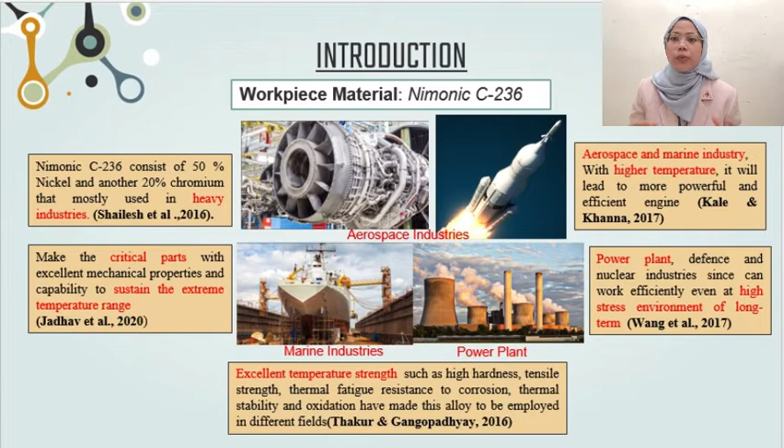Excellent temperature strength such as high hardness, tensile strength, thermal fatigue, resistance to corrosion, thermal stability and oxidation have made this alloy suitable for critical parts with excellent mechanical properties to sustain the extreme temperature range.

Next, to machine the Nimonic C-263 workpiece material, high-speed turning is used. High-speed turning is the machining of the external surface of the workpiece by rotating a single point cutting tool to remove material from the workpiece. This high-speed turning is around 2 to 50 times higher than the conventional machining cutting speed.

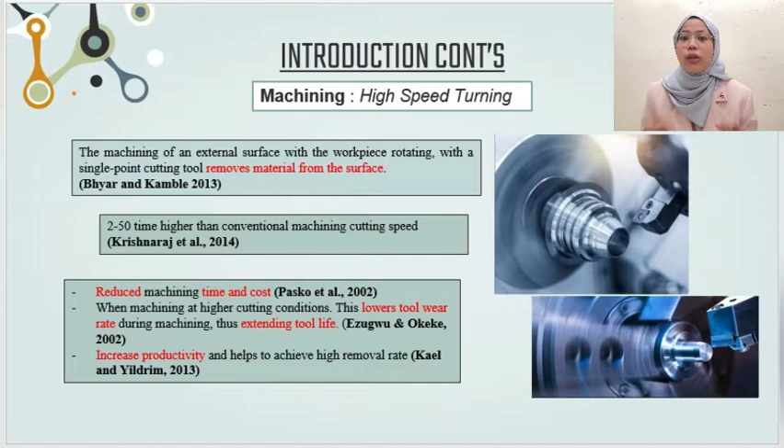High-speed turning can reduce the machining time and cost and increase the productivity, which can be achieved by a higher material removal rate (MRR). Then, when machining at this cutting condition, it will lower the tool wear rate and thus extend the tool life. Just using high-speed turning is not enough to study the tool performance during turning Nimonic

C-263. Cryogenic CO2 coolant is a neutral coolant. Basically, coolant exists as a cutting fluid. Coolant fluid helps to increase the tool life, enhance the surface quality, and decrease the cutting force.

But conventional coolants fail in lubrication at higher metal removal rates and cause environmental pollution. So this cryogenic CO2 coolant is a clean technology and environmentally friendly. It also does not have a dangerous effect on the operator. This cryogenic CO2 coolant technique is done at a temperature of -78 degrees Celsius.

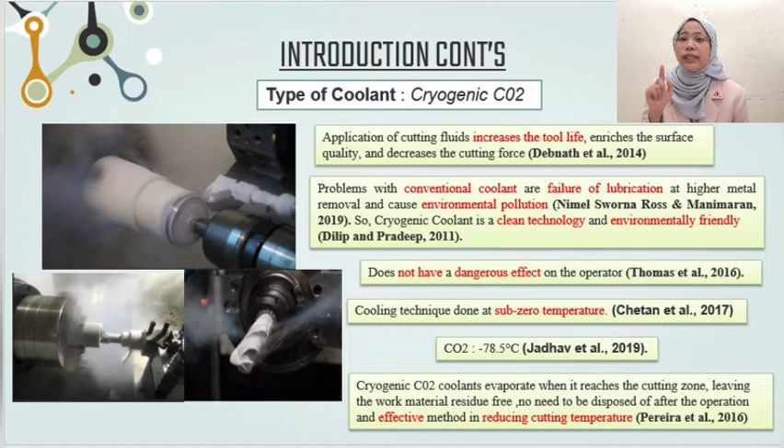The problem statement in this project, first, Nimonic C-263 alloy is in great demand in heavy industry, but great difficulty is observed while machining this Nimonic C-263 alloy at various stages due to its low conductivity at higher temperature, work hardening tendency, and rough particle formation in its structure.

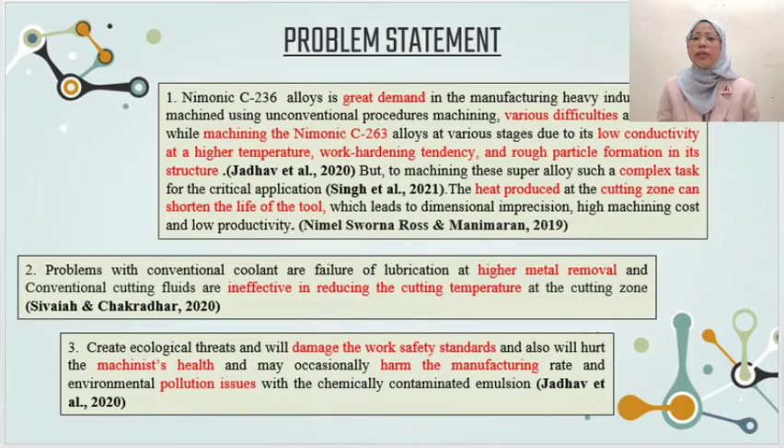Due to high temperature during machining, the heat produced at the cutting zone can shorten the life of the tool. Second, the problem with conventional coolants is failure of lubrication at higher metal removal rates, and conventional cutting fluid is also ineffective in reducing the cutting temperature at the cutting zone. Thirdly, most cutting fluids will damage work safety standards and also harm the machinist's health. That will harm the manufacturing rate and cause environmental pollution issues.

The objectives in this project, first, to identify the significance of the cutting parameters on the tool life during turning Nimonic C-263 alloy under cryogenic CO2 coolant. Second, to develop a mathematical model for the tool life through statistical analysis. And thirdly, to optimize the cutting parameters towards the tool life of the carbide insert.

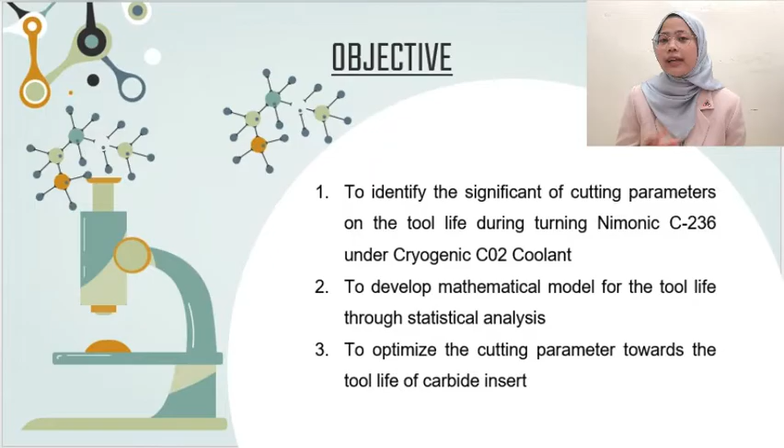Regarding the literature review on my screen, I would like to summarize. The Nimonic C-263 has a higher percentage of cobalt, between 19% and 21%, that will improve the material strength and high plastic distortion that make the material harder to machine. Then development of BUE will blur the surface integrity and lead to tool failure.

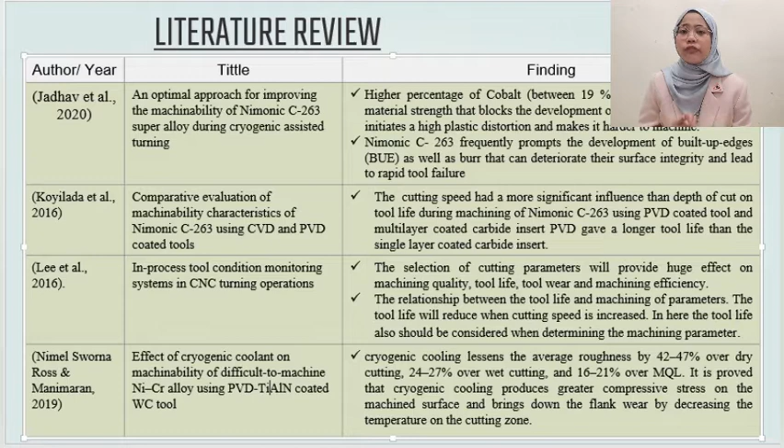The selection of the cutting parameters will have an effect on the machining quality, tool life, tool wear, and machining efficiency. The relationship between the tool life and the machining parameters is that the tool life will be reduced when the cutting speed is increased. Here, the tool life should be considered when determining the machining parameters.

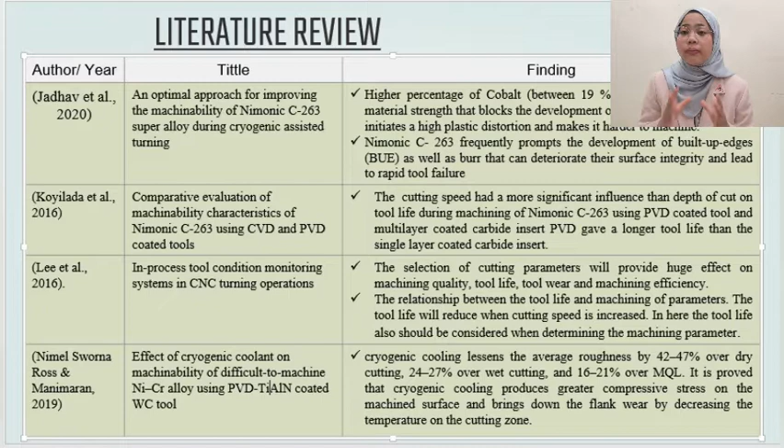With the help of the cryogenic CO2 coolant, it's another effective approach to keeping the cutting zone temperature well below the softening point of the tool material. The cryogenic process will increase the tool life by increasing its toughness substantially and also its resistance to wear.

Based on this literature review, it has been established that the machine tool properties, workpiece properties, cutting tool properties, and machining properties deeply influence the machining surface integrity and the tool wear.

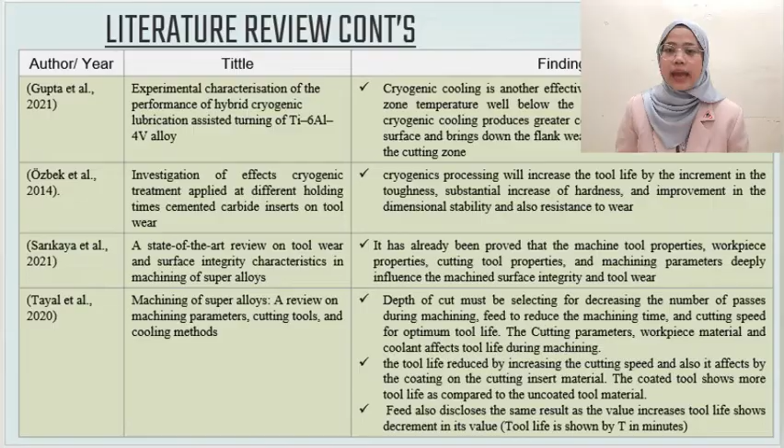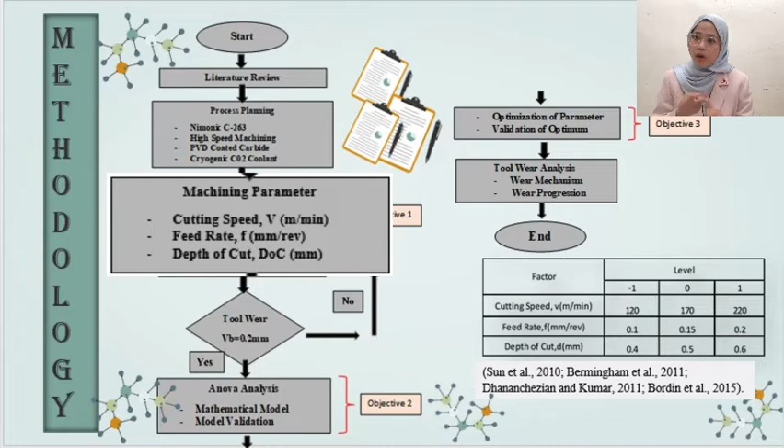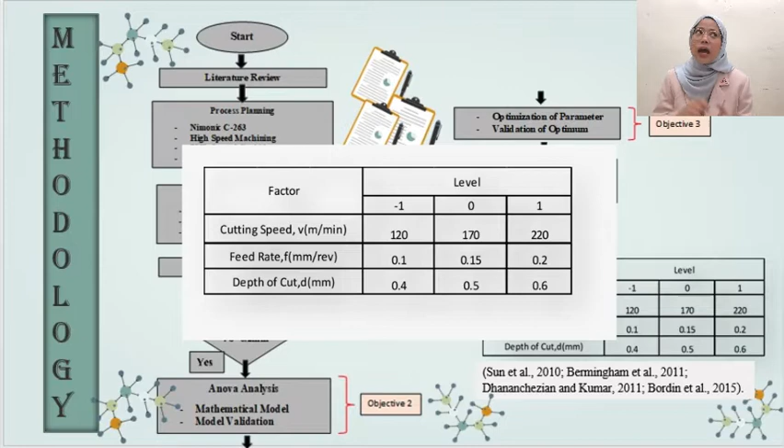The cutting parameters like cutting speed, feed rate, and depth of cut are selected based on the literature review and handbook guidance suitable for the machining process. Then the process parameters are selected for further optimization using response surface methodology (RSM). The cutting parameters selected in this experiment are based on current and past research. It was suggested that the range of cutting speed is 120 to 220 meters per minute, feed rate 0.1 to 0.2 mm/revolution, and depth of cut 0.4 to 0.6 mm.

Here is objective 1. Machining parameters were generated using the RSM Box-Behnken design with Minitab software, having 3 factors at 3 levels, which is 3 inputs and 2 outputs with 5 center points per block. This will generate 17 samples of parameters that will be used for the machine experiment for objective 2.

In this turning process experiment, the experiment continues using the same cutting tool until the tool wear value VB reaches 0.2 mm. If the tool wear has not achieved 0.2 mm, machining continues. If yes, then the ANOVA analysis is done.

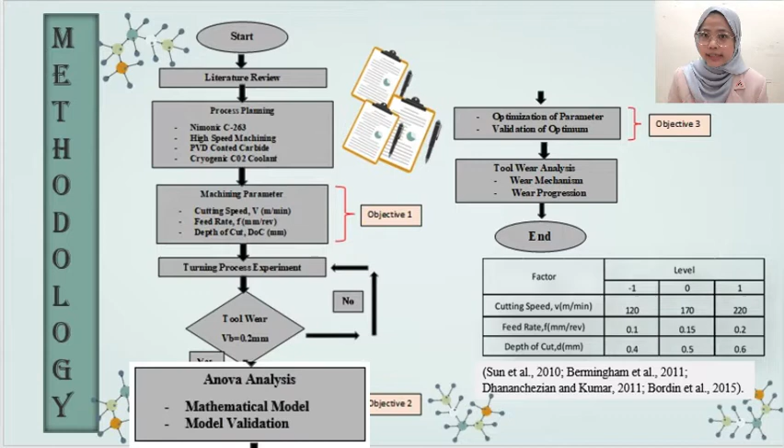In this ANOVA analysis, a mathematical model is developed to indicate the relationship among parameters on the tool life. By conducting the experiment, we can determine the accuracy between the developed mathematical equation and the experimental result.

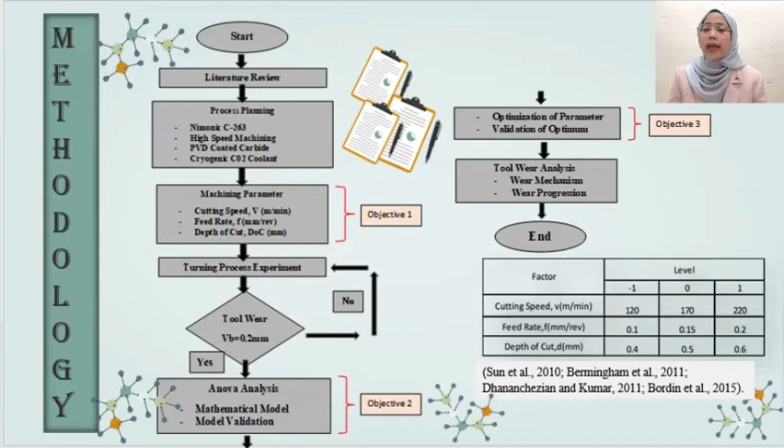Here for objective 3, the optimization is conducted with the aim of achieving the higher tool life value until the pre-optimal parameters are selected. The accuracy of the pre-optimal parameters is also verified by a validation experiment.

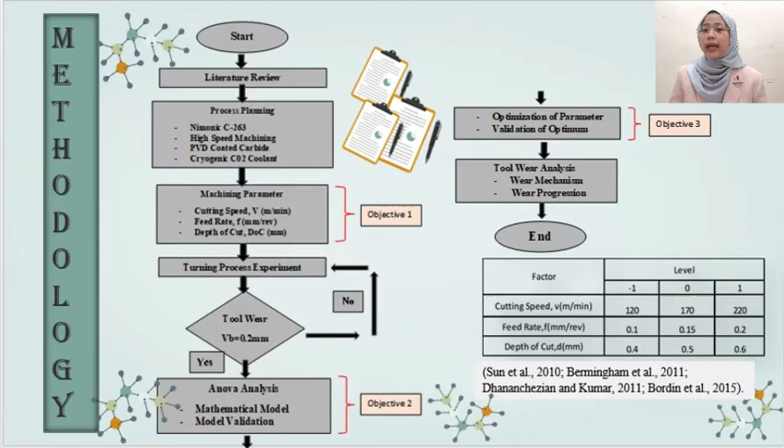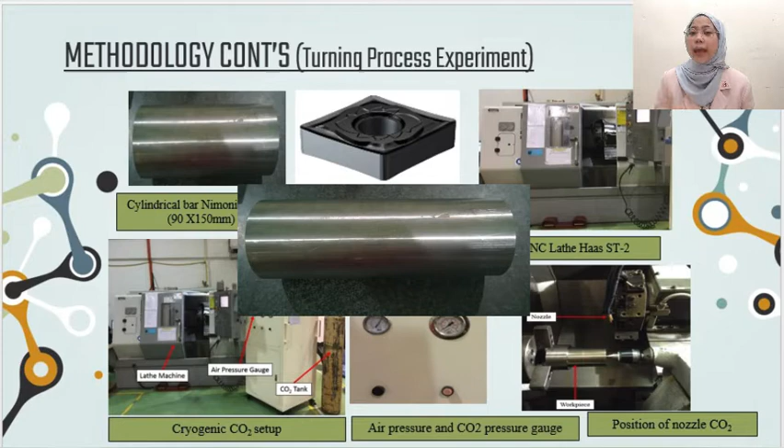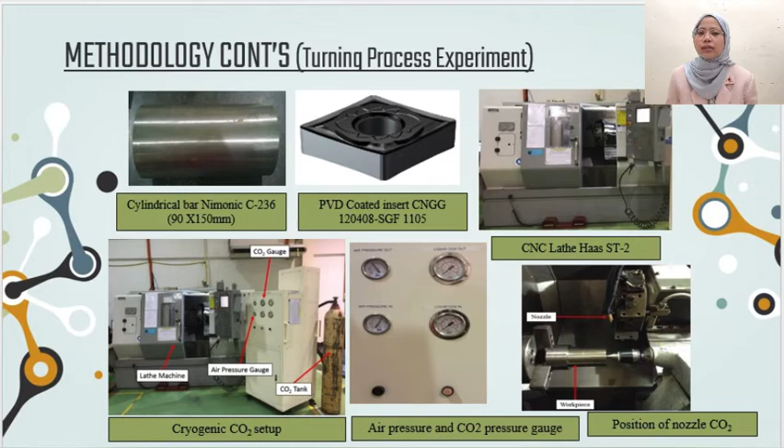Then the cutting parameters are set as arranged in the RSM Box-Behnken design. A cryogenic coolant system was developed to supply liquid carbon dioxide CO2 as a coolant, supplied directly to the cutting zone through a nozzle to reduce the cutting temperature during the machining process.

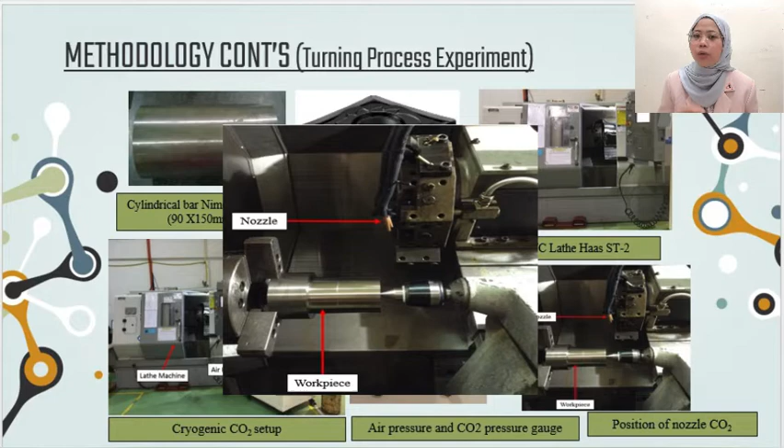After the turning process experiment is done, measurement analysis is performed for the tool wear. During machining, a thermal imaging camera is positioned on top of the machine so that the camera is more stable while recording. This camera is able to record the minimum and maximum temperature generated during machining.

Then SEM: this machine produces images by scanning the surface to investigate the wear mechanism that affects the tool wear and detect excessive cutting tool damage.

The tool maker microscope is used to measure the dimensions and angle of the machined metal. It also measures the tool wear, such as flank wear and flank face. Lastly, X-ray diffraction, XRD.

This machine is normally used to determine the chemical composition and crystallographic structure of the material.

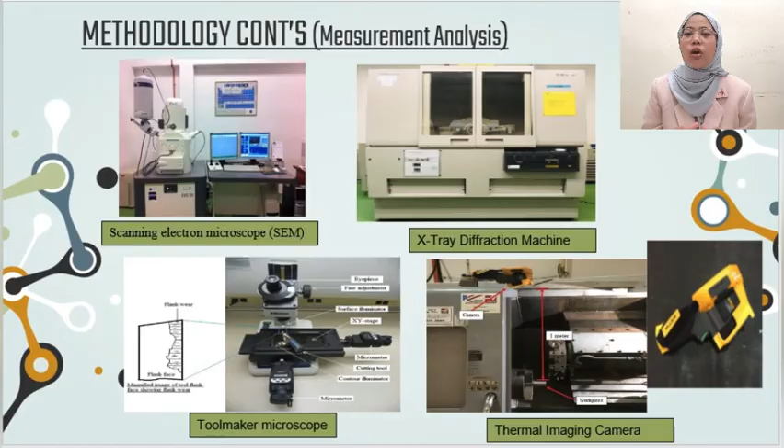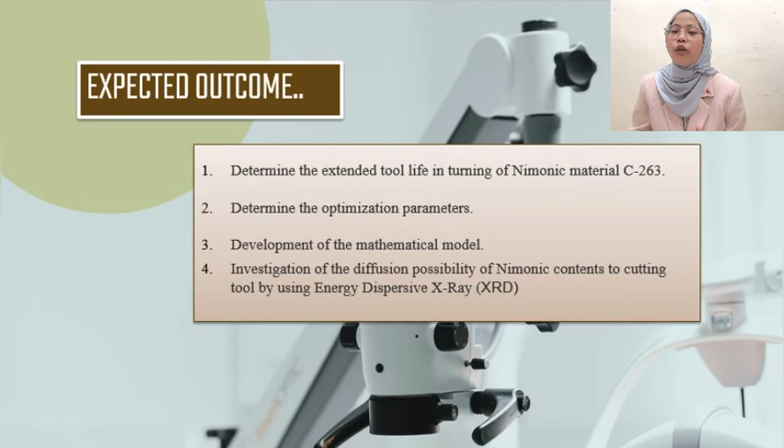The expected outcomes are: 1, to determine the extended tool life in turning Nimonic material; 2, to determine the optimization parameters; 3, to develop the mathematical model; and lastly, to investigate the diffusion possibility of Nimonic content into the cutting tool using XRD.